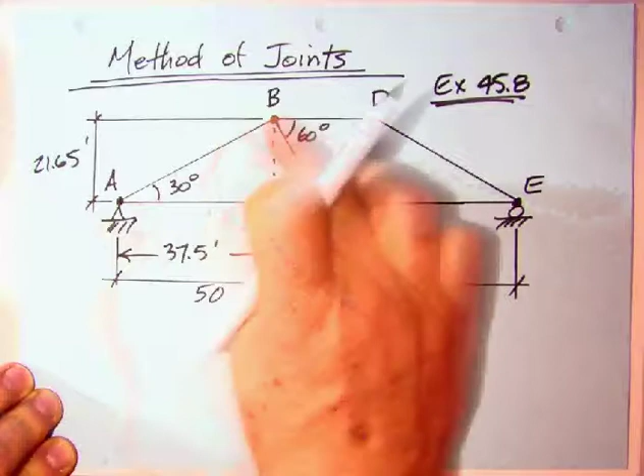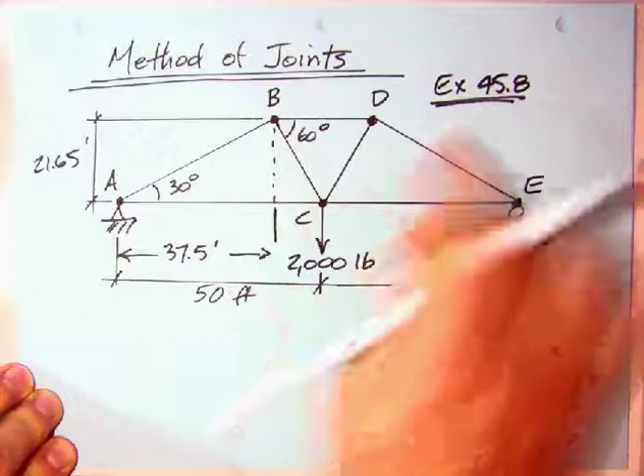And then what we have at A is a pin, and from there they found AB and AC, those two forces. Then proceeded up to B, and at B, now that we know AB, they could find FBD and FBC. And then, because of symmetry in the loading and the geometry, they invoked symmetry that this force and that force were the same, this one and this one were the same, and that one were the same, which is true, and they were done. Let me kind of summarize that here shortly.

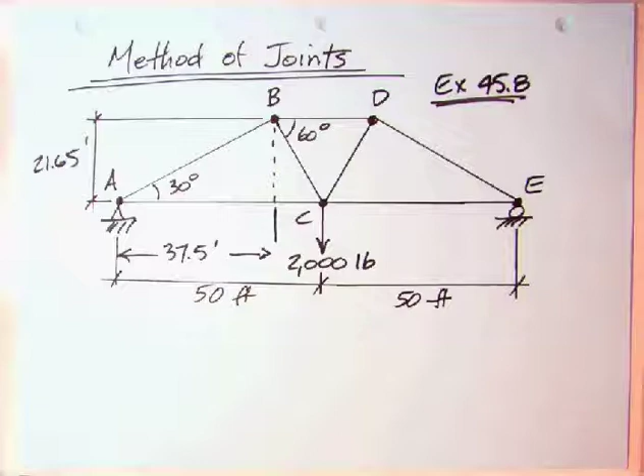So again, that was kind of quick, so let's summarize again what was done. They started at pin A, start somewhere where you have only two unknowns, but the reaction at A was an unknown, so they had to go in and find that reaction at A, which of course turned out to be by symmetry as well, 1,000 pounds.

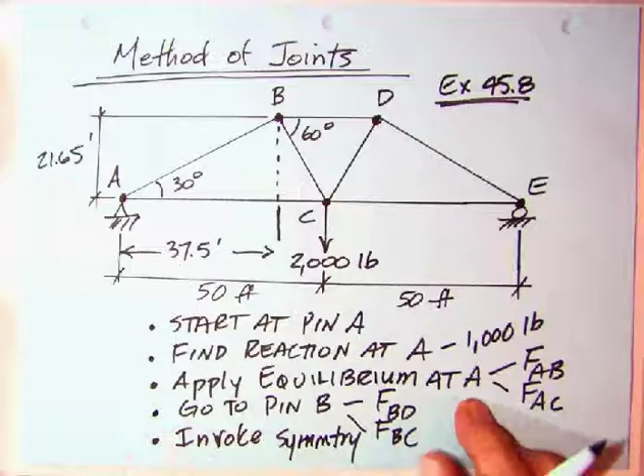And then they applied equilibrium at A. There's only two equations, two unknowns, found FAB and FAC. Then they went on, proceeded up to B, where now with this they only have two unknowns, so at B we got FBD and FBC, and then invoked again symmetry that these two were the same, those two were the same, and those two. Well, and then they provided a summary diagram, which is on the next page here.

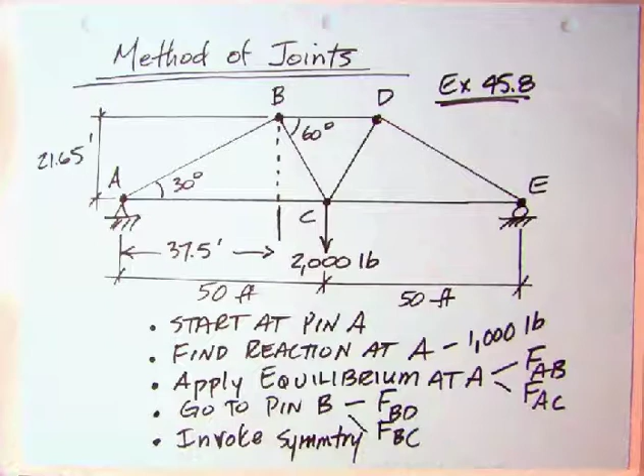This is the summary diagram they provided, although the diagram in the MERM has all these arrows here, which I've been doing this a long time, over 30 years, and I still don't understand those arrows. I mean, somebody gives me a diagram with that, and oh, I don't know.

But they already had the C. They got 2,000 compression, 1155 tension, 1732 tension. So you only got T or C, you don't really need the arrows. If you're being confused by those arrows, join the club. If somebody wants to use them, that's okay, but no, T or C will be just fine here.

Okay, so realize that in the PE exam, if you wanted FBD up here, you couldn't start here at A and then go up to B. That would be way too much.

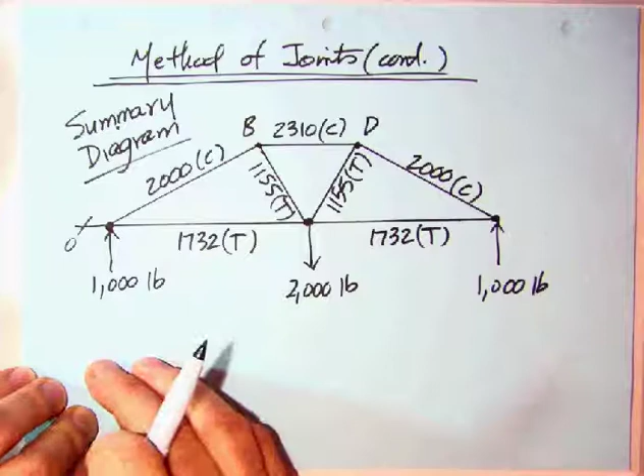I think the more likely MEPE exam problem would be the following. Okay, let me write that out first.

Okay, what I'm going to propose is, suppose that they go on and give you that the force in FAB is the 2,000 pound compression. That's given. Find FBD.

Well, this certainly would be a good use of the method of sections. Make a cut through here and cut only through three members. But now you've got to draw either this piece or that piece based on what you're going to have to do. You're going to need the reaction at A.

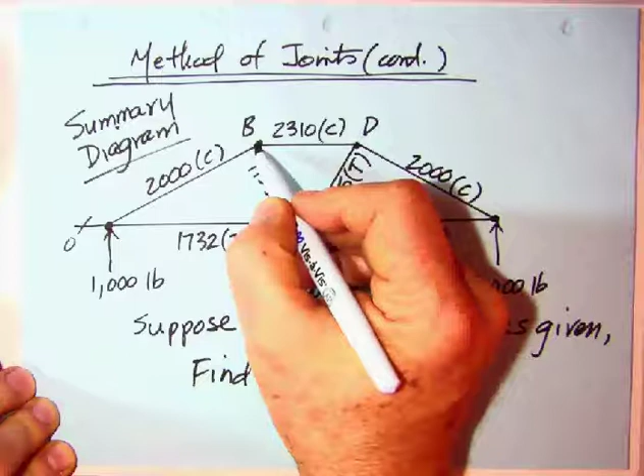No, if all they wanted was FBD and they gave you FAB, then the method of joints, but right at pin B. Again, it's kind of a, you almost could call this the method of pins. The joint is members coming together at a pin, but remember the members have already been analyzed and they're two-force members, so you don't do any more equilibrium on them. The only thing you can do equilibrium on are the pins. So it's sort of like you're looking at a pin, but that's a joint. So some people call it method of pins here.

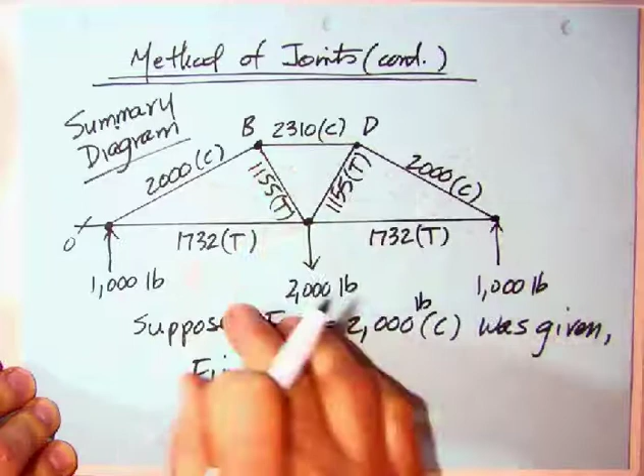Well, okay, let's look at all you need to do is just look at pin B, and you'll have only two unknowns. You'll have that one, and you can solve for FBD. So let's see what that looks like.

Okay, I've kind of done a lot of drawing here to save you time, but the way in which I do this, I sort of draw the pin at B. I then draw the members. I know that seems like it's extra effort, but it really doesn't take that long, and you can now see the tension or compression. You're given, again, FAB is 2,000 compression, so put it in compression, and then you now know Newton's third law says the 2,000's got to be that way, and you can put the direction on that force 30 degrees down here.

Then up here, if it's an unknown member, I make it tension. I don't even think about it. You can think about these and look at them, but no. If it's unknown, I put it in tension. The process will tell me whether I'm right or wrong. Every time you try to put one on here in compression, you will shoot yourself in the foot, believe me.

Okay, so we've got this one's in tension, so therefore out, so therefore FBD is to the right, the arrow there. Down here, tension, again, FBC is in that direction, and the direction of FBC is given by this down here. And I then take, and once I've got that drawn, I kind of come in here and cloud around what I'm going to apply equilibrium to.

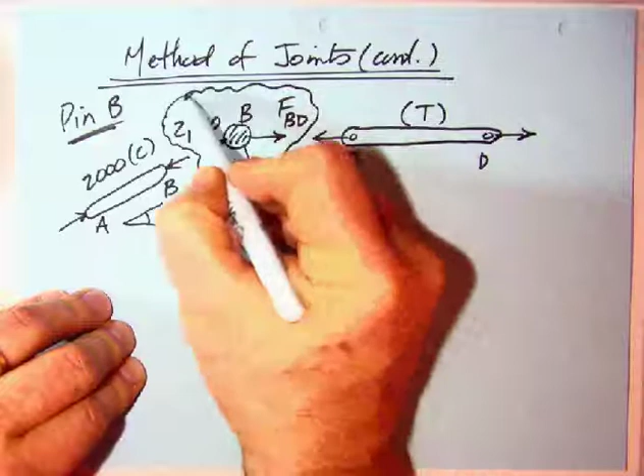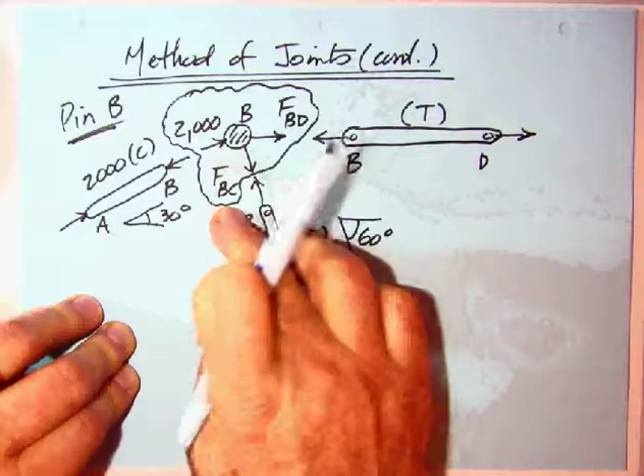Again, kind of focus in. Now you could just draw that, but the thing is, to me this doesn't mean anything to me until I see that. This doesn't. I have to sort of draw these members in my head in order to figure out what they mean. Well, that's not a very good place for me. I don't know about you, but that's not a good place. So drawing them in here doesn't take that much time.

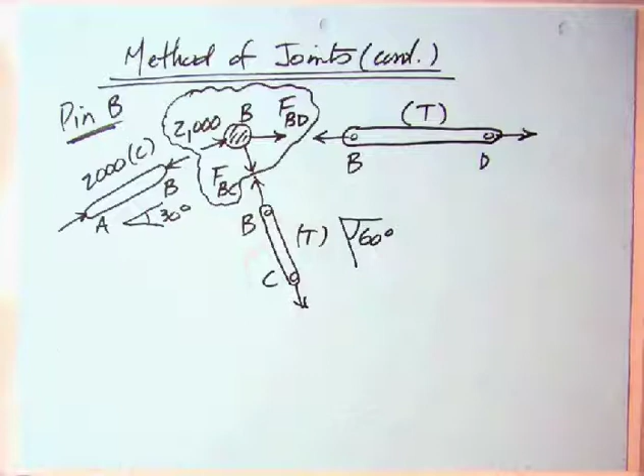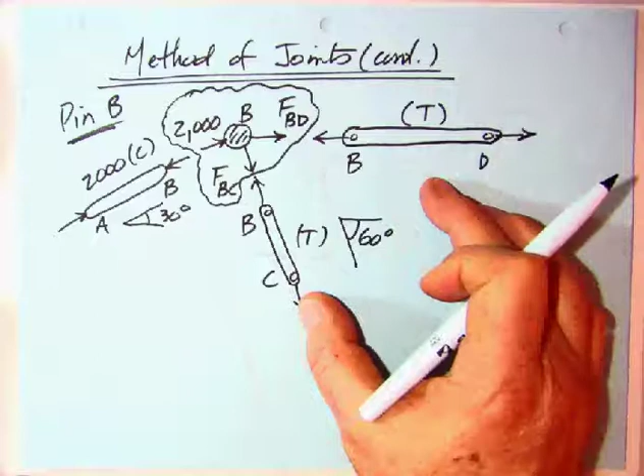Okay. So now you got a free body diagram. You got two equations. This is concurrent forces. No moment's going to be applied. Sum of the forces horizontally and vertically will get your answer. So let's do that.

Okay, applying equilibrium. I use this sort of very short-handed symbology here in another one of my MERM instructional video companions on the compound beam. I use sum of the forces equals 0, positive to the right, but this is much simpler, and this is sort of a symbol that says sum all forces horizontal, set them equal to 0, make positive to the right, so all of that's kind of locked into there. And so if we look at our free body diagram, just the pin, we've got 2,000 times the cosine of 30, we've got the FBC times the cosine of 60, and then plus FBD equals 0. I'm going to call that equation number 1.

And then this is again my symbol for saying similarly to this one, sum all forces vertically, set them equal to 0, make positive up.

Okay, so this one has 2,000 times the sine of 30, minus FBC times the sine of 60. FBD, of course, only is horizontal, so that's equation number 2. You can see why they could have given you FAB and asked for, or not asked for FBC, because you could find that by just this single equation here. No, we need to realize that you need to do both of them, find FBC, put it back in here, and now you can find FBD.

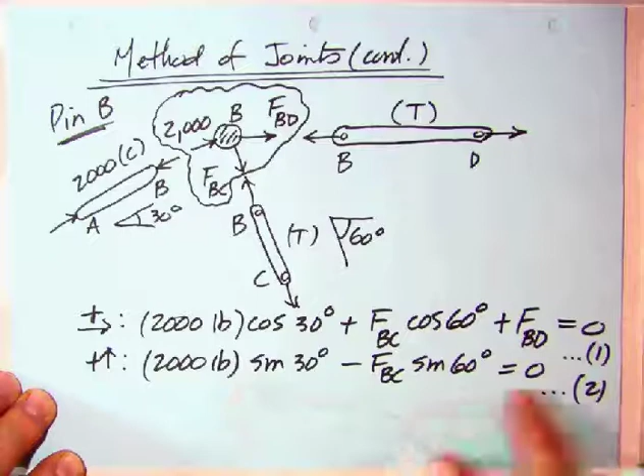So let's solve this equation number 2 for FBC. What we're going to do is take this to the other side, divide both sides by sine 60, and what you end up with is 2,000 times sine 30 divided by sine 60. Do the arithmetic and you get a number very close to 1155, which is what was gotten in the MERM solution.

But notice that you've gotten a positive, so the assumption that you made of tension is true, and that's how you do it. You came out with a positive. If you came out with a negative, then what you have is negative tension, which is compression.

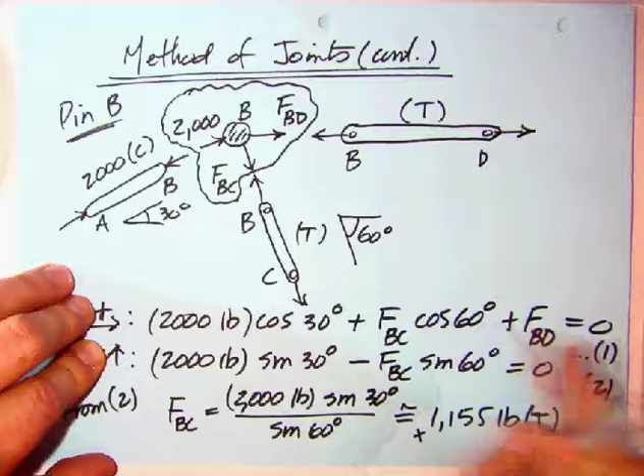Well let's take this answer and go back to equation number 1 and solve for our FBD. We'll do this in several steps here, so we don't lose anybody. If we just solve for FBD, we get minus 2,000 cosine 30 minus FBC cosine 60.

Now remember that in doing this, substituting FBC, whatever you got for FBC, in this case we got it as positive, but if we'd gotten it as negative, you'd put it in here anyway. So both of these are negative, so I'm going to put a negative here and a bracket around, so that we end up with 2,000 times cosine 30 plus 1155 times the cosine of 60.

And so we end up with, and I kind of do two terms here, 1732 pounds plus 578. I'm going to give myself some breadcrumbs here. So I've now got those two, minus 2310 pounds, and I assume tension.

So what I have is minus, but it's tension. Well, minus is equal to compression. So we got now 2310 pounds compression, which again is what was gotten in the MERM.

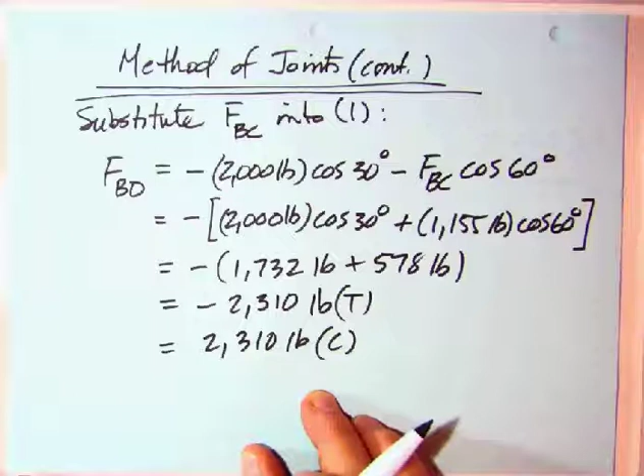There is, again, no need to make any assumptions. Look at the diagram, sort of try to figure things out. Once you have all the answers, then you go back to your summary diagram and begin to say certain things or draw certain conclusions. Let's do that.

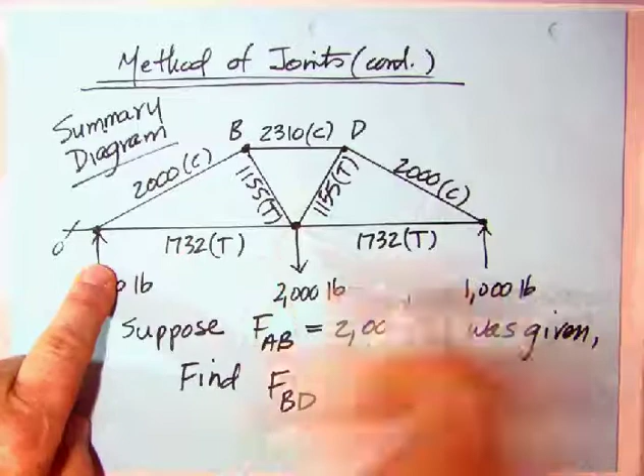Once you have your summary diagram, you can look at it and say, okay, well this is pulling down. Oh, okay, I can see that's sort of trying to push this in at the top. These will be in tension, kind of pulling down. These two are pulling, and that's going to try to make that kind of compress. Yep, those two. So these four are in tension, and these three up here are in compression.

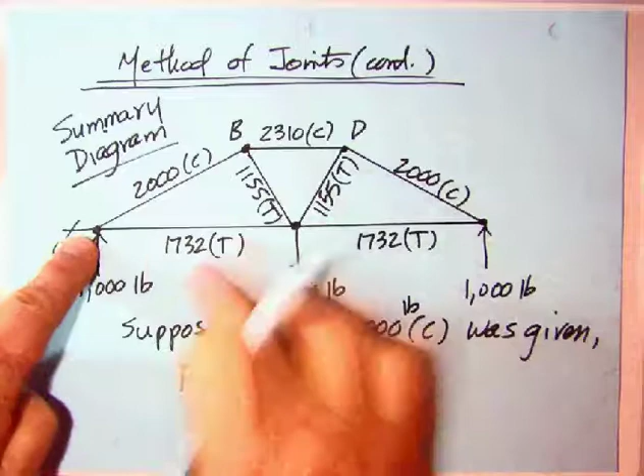Yeah, that makes sense. And then what you're going to do is put this up on your wall if you're designing this truss, and it'll be something that you can have in front of you as a design. For trusses, the biggest problem is buckling, so you design, and if you're going to make them all out of the same thing, you look for the biggest compressive member. So that's what's going to determine the size of all the other members. There is that one. That's why I'm actually going to try to find it, because that's the key member.

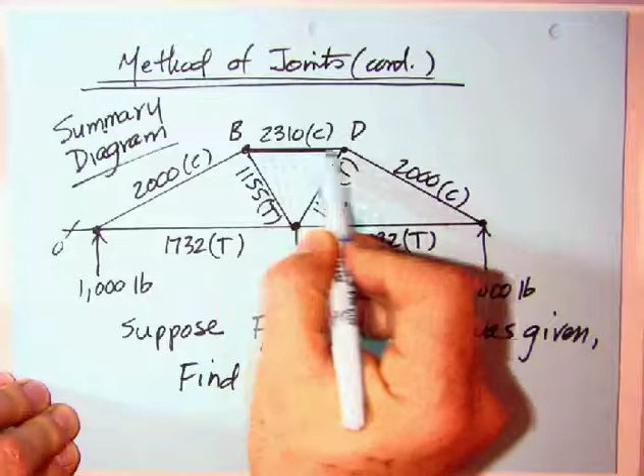Well, I think that's a much better problem for the MEPE exam. You might have something different if you're taking a statics course, but that is certainly the MEPE problem.